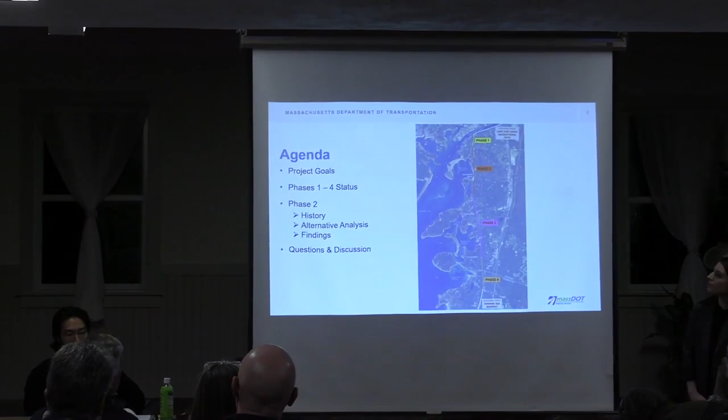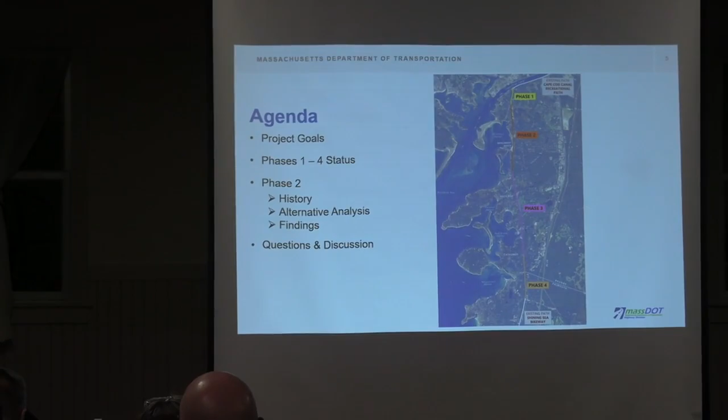On our project goals, we're going to talk a little about the overall project goals, the four phases depicted in our graphic here, which isn't great and legible, but I'm sure everyone in this room knows this better than the graphics on the screen. We're going to introduce the design consultant, VHB, who's working in parallel. They've been working for the town for a number of years on the project. I'll get into that in a moment, but also for this phase, this alternative analysis we've asked them to do. They were the most knowledgeable design firm that had been working closely with the town, so MassDOT engaged them to do a feasibility study for the section of Phase 2.

Can you hit that next slide, Joe? So our project goals, as part of our statewide bike plan, we want to establish and implement a region-wide trail network for all users. The goals on this project for all four phases were to connect the canal path to the Falmouth Shining Sea Bikeway. It was identified in the Vision 88 plan by the Cape Cod Commission, and as stated, under MassDOT's statewide transportation plan, shown on the right side of the screen.

Our goal here tonight is to evaluate alternatives that can be implemented. A couple things I wanted to state at the outset: the Town of Bourne has been a great partner with MassDOT on all phases of the Bourne Rail Trail project. The town hired the designer, VHB, for phases 1, 2, and also 4, which is working in partnership with the town of Falmouth. As the design is developed, constraints with standards, right-of-way, and permitting have surfaced.

While the Highway Division designs and implements many trail networks statewide, we follow design standards as they interact with and possibly impact stakeholders. There needs to be a compromise at times. I don't want to get into the specifics now—I'll let VHB go through a summary of the phases in a moment. However, DOT recognizes that when constraints become barriers to implementation, we've got to find a way through. It may not be 100% consensus; we never achieve that on any project.

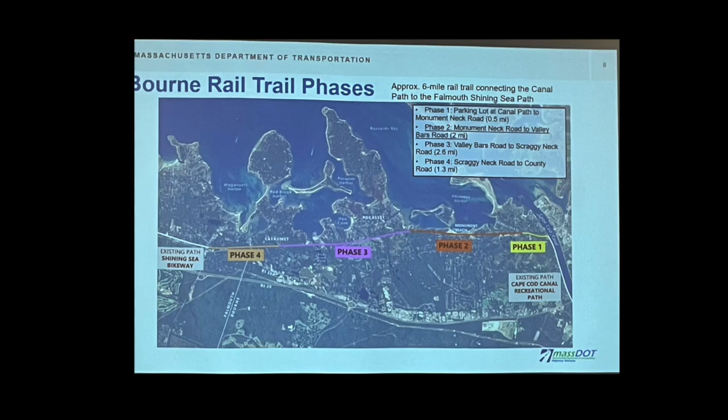Oh, look at that—this is the graphic that John doesn't like, obviously, showing all the phases here. This is just color-coded, but it shows that the trail goes from the canal and will connect into the Shining Sea in Falmouth.

So we wanted to give you a little bit of a project status. We're not just stalemated or banging our heads against the wall—we're moving, we're making progress on this project. It's slow and very methodical; we have to go through the process. For Phase 1, the advertising date is June 2025. So we're nearing final design—there's a few more things to take care of to get there. We're at 75%, and we have the 100% plans at our office waiting to file.

Phase 2 is why we're here tonight—we want to look at different alternatives and ways to get around some of the constraints we identified back in 2019. Phase 3 we're going to start initiating; it's very challenging, with a lot of water courses to cross—tonight's not the night to talk about that, so we'll discuss it in the future. Phase 4 we're at pre-25; we've been meeting with Falmouth and with the rail division on that. That's tucked away right now until we get Phase 1 done, and then we'll talk about Phase 2.

So I want to give you a little bit of the design criteria. We don't just design bike paths. We don't put a bunch of asphalt on just a side line on the railroad or next to a roadway and call it a side path. There's design criteria that we have to follow. And I want to get into a little bit of the history from 2019 to now.

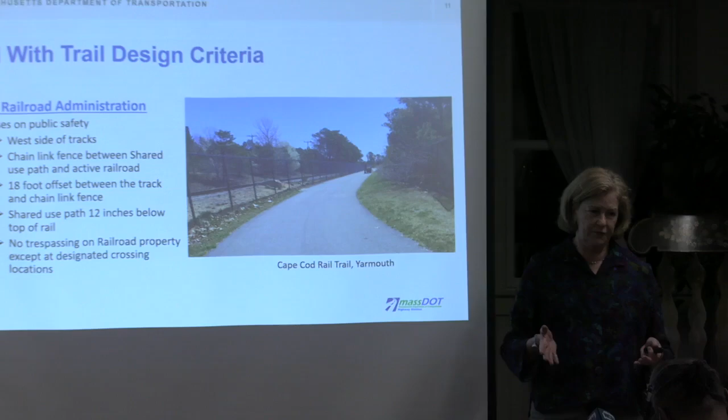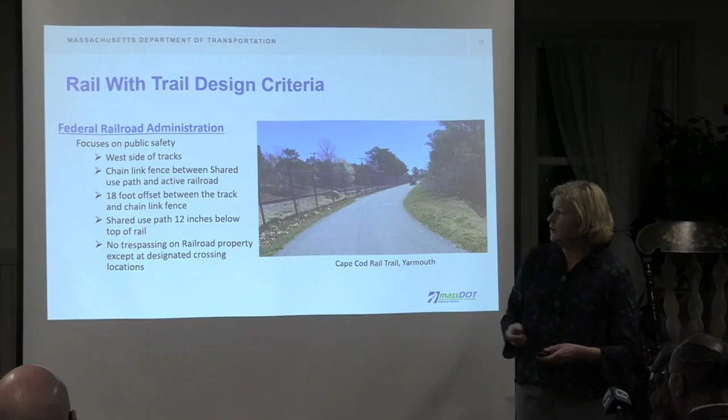One of the things we really had to keep in mind with the railroad is they are very concerned about public safety. They want to make sure that there's no public trespass on their facility. They want to make sure there's an offset from the railroad itself to whatever facility is being designed or proposed for the shared use path. So what they wanted to do is put a chain link fence between the active railroad and the shared use path, put an 18-foot offset between the center line of track and the chain link fence. They want to make sure there's a lot of separation between the two facilities.

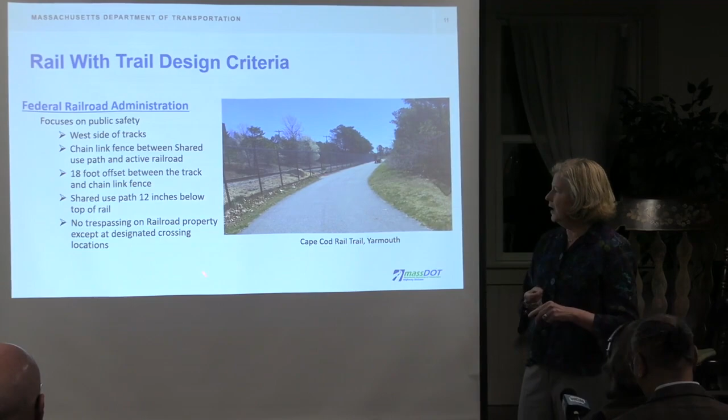And the 12 inches below, that's something that will come into play behind the depot at Worcester Ave. They over and over again express their concern about trespass on the tracks. They know that people are trespassing now, and they want to make sure people are safe. Whenever we go on the tracks, we have to have railroad safety training, and that training shows a lot of accidents, and it really does happen. So they're very concerned about that.

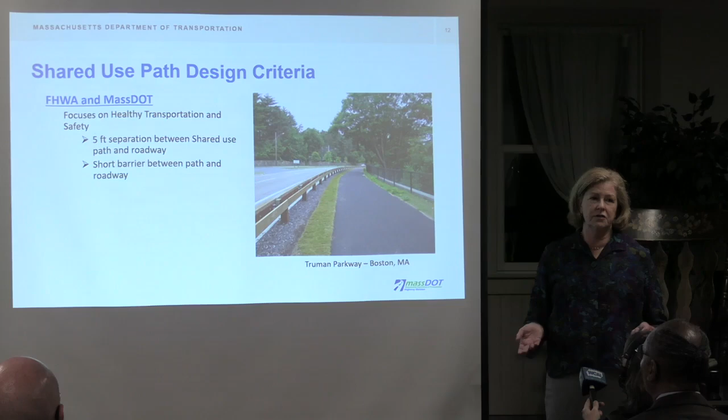FHWA, the Federal Highway Administration, and MassDOT also have a lot of design criteria that we have to follow. What we have to do is really focus on healthy transportation, making sure shared use paths are universally accessible. Like I said, we're not just putting down pavement on the side of a road or the side of a railroad. We have to make sure it has certain thresholds and parameters that we are designing to.

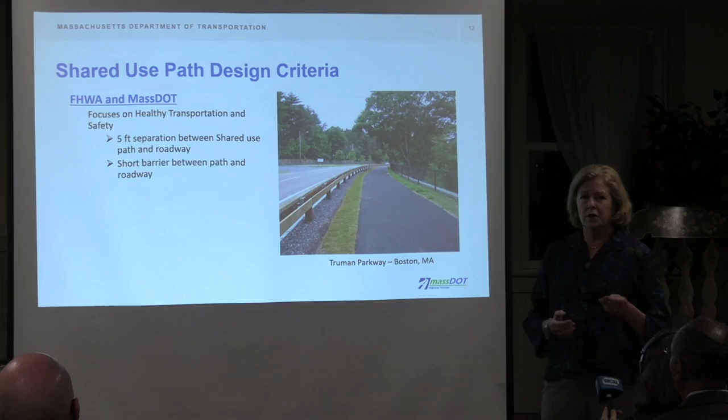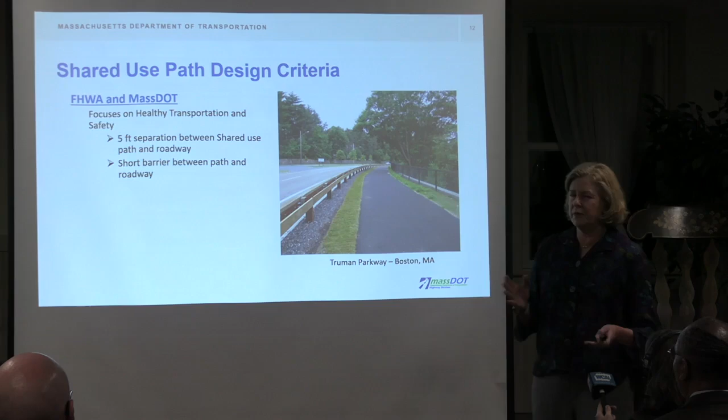Some of the key things we have to talk about here is that there will be a 5-foot separation between the roadway and a shared use path, if that's an alternative you guys would want to consider. And there could be, maybe or maybe not, some type of short barrier, so there would be a separation between the roadway itself and whatever facility is designed next to the roadway for that alternative.

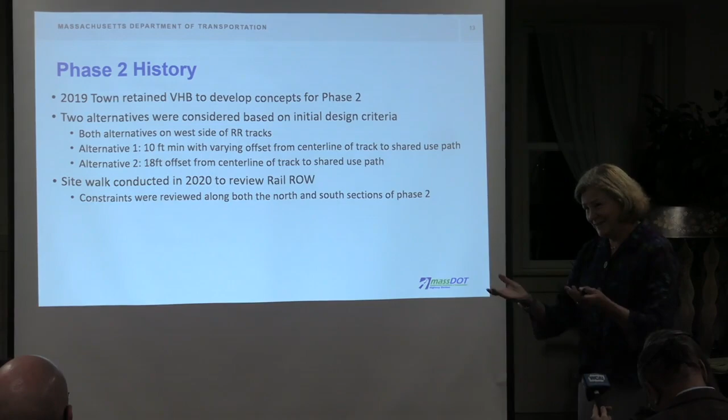So a little bit of history. I have to read this, and it's big enough I don't need my glasses. In 2019, we went under contract. We went through a public procurement process and won the contract. Thank you very much, Town of Bourne, for developing concepts of phase one and phase two. We're talking about phase two tonight.

The two alternatives we considered, and Marissa's been with me every step of the way, was taking a look at what could be built in phase two. Remember, phase two is from Monument Neck down to Valley Bars. And what we did was take a look at, okay, if we were within the right-of-way of the railroad, not knowing that we had the 18-foot offset, what could we put in there?

So the shared use path and the offset from some of the constraints adjacent to the road, the right-of-way, was we had the offset from the railroad, the active rail, to the shared use path, and it went down to 10 feet, and then went out again, and then went down to 10 feet. And we presented that to the MassDOT Rail Division. I'm just going to call it the Rail Division. And they were very concerned about that, and they told us we had to hold the 18 feet.

So when we did that, there were a lot of things that came up. There are a few red flags. There are some constraints, and I'm going to go through these tonight so that you understand what we went through back then.

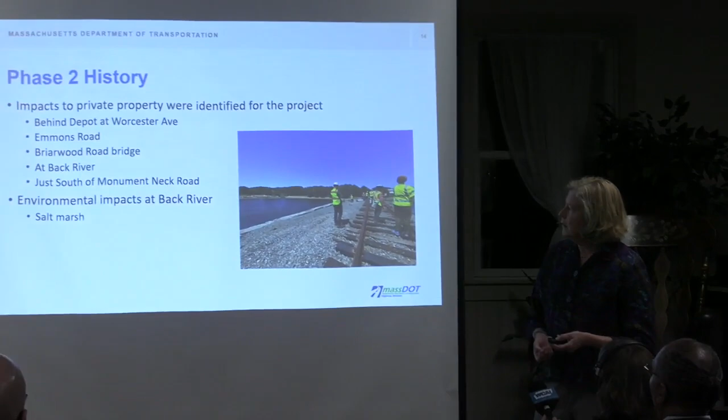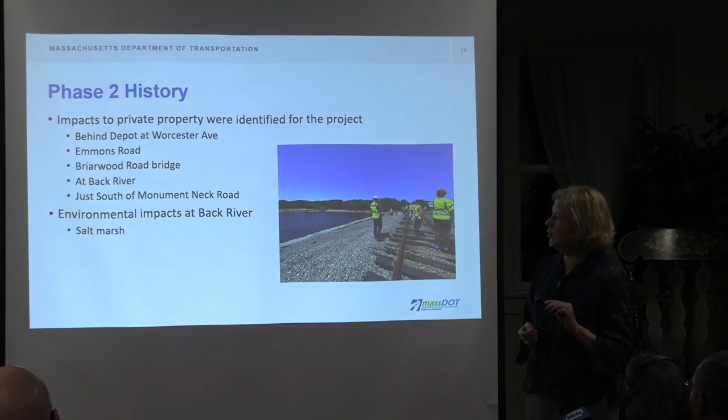Some of the things we saw were impacts to the right-of-way, keeping the 18-foot offset, and impacts into private property. These locations were specifically behind the depot—I have a graphic to show you—at Emmons Road, at Briarwood Bridge, and at the Back River, and just south of Monument Neck Road. So there are existing features we have to take a look at when designing rail trail projects, which is what we're talking about tonight.

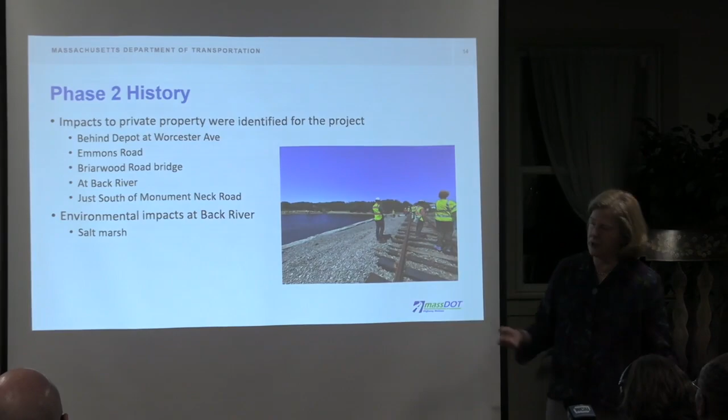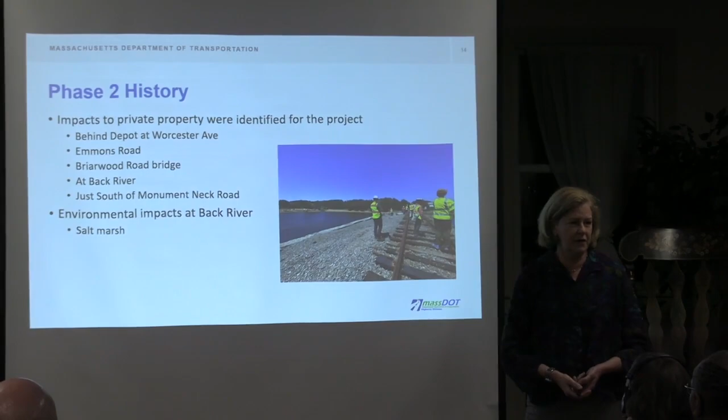The other thing we had to note was some of the environmental features out there. This is a bunch of us nerds out at the Back River—you can see it's a beautiful vista, it's gorgeous, a really lovely spot. But there's also salt marsh and other things we have to be mindful of as we move forward with permitting.

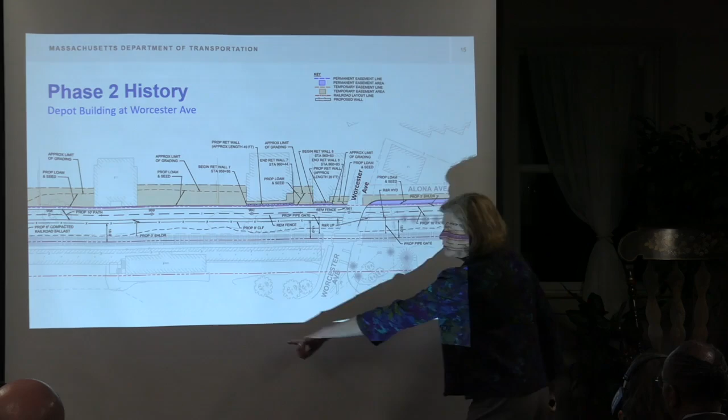So there were some constraints we had to take a look at. This is a concept plan we developed in 2019, 2020. This is Worcester Ave, and Shore Road is down here—just trying to get it oriented.

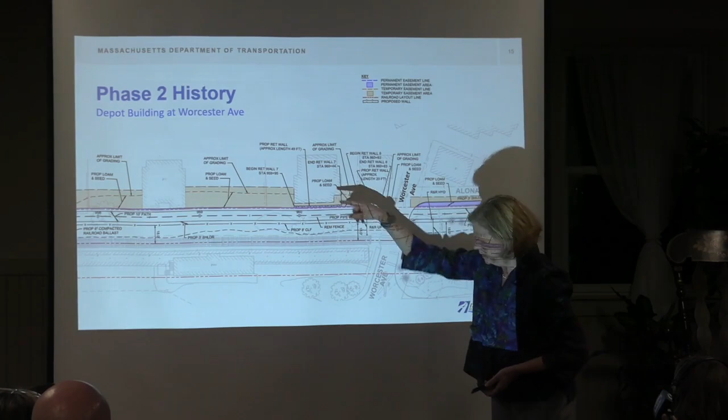This is the active railroad, and this is the depot building here. These boxes are all the residential houses behind the depot, which you all know, right?

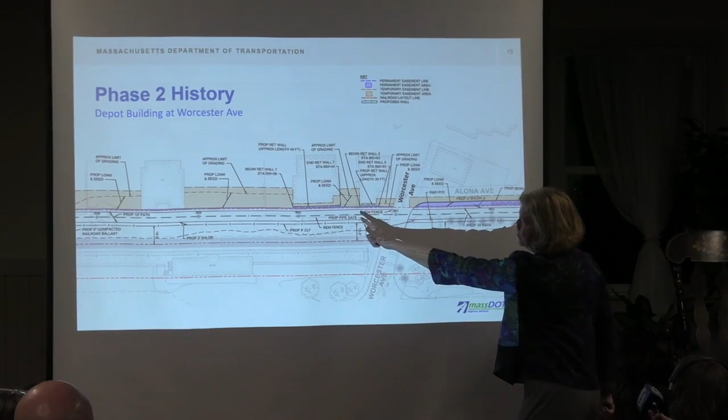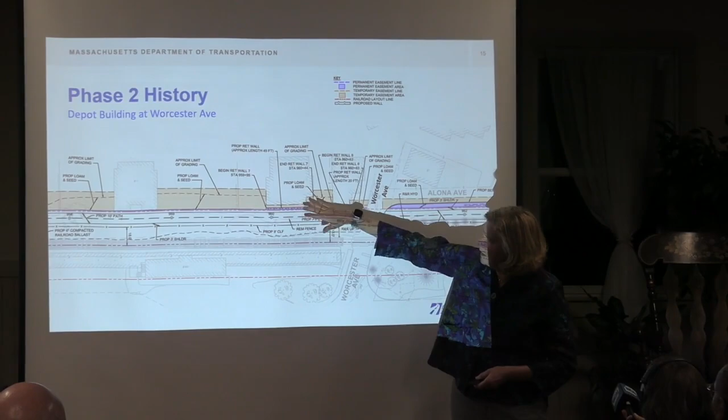If we put the shared use path 18 feet off the center line of track—one of the design criteria to meet safety for the railroad—the shared use path ends up very close to the residential property, with one actually on it. One concern was whether we could put in a retaining wall, but the houses there would have the wall right at their back, whereas now they have at least some space between the railroad and their back door. This was one of the areas we thought was very constrained.

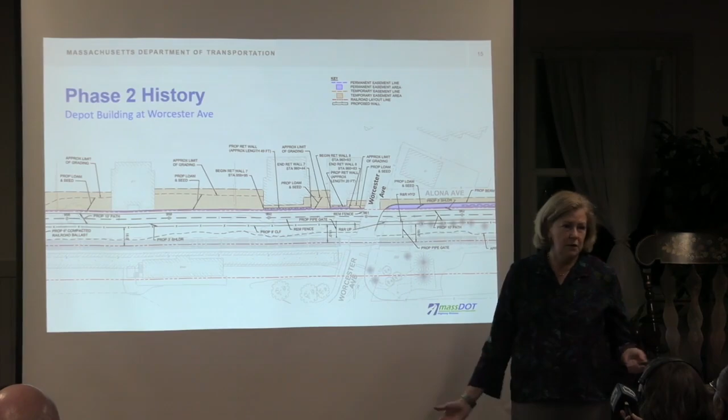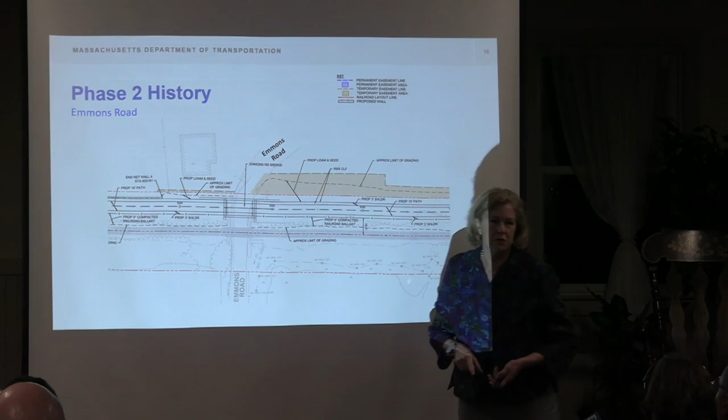This is Emmons Road—you know that really narrow, short bridge. If we put the rail with trail, the shared use path, 18 feet off next to the railroad here, it's about 20 feet off of that house. That's something else we wanted to think about. It fits within the railroad right-of-way, but it's very close to that house, just encroaching a little bit.

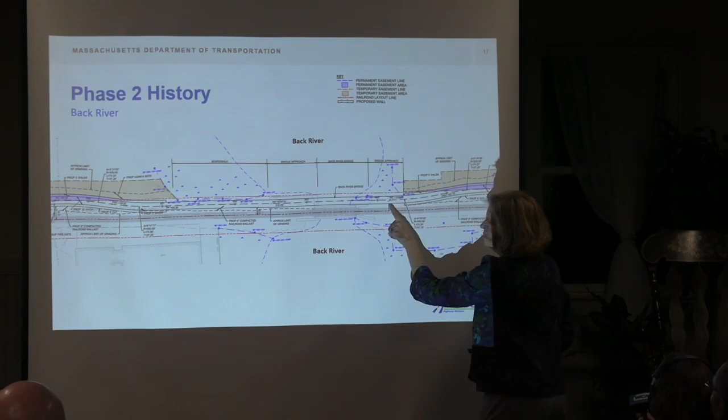That's why it goes down and over, can you see it? The reason is there are existing abutments from the former railroad—there used to be something there, you guys could probably tell me what it was—and we can reuse that for the shared use path. These blue lines are some of the salt marsh, which is something we have to be very mindful of.

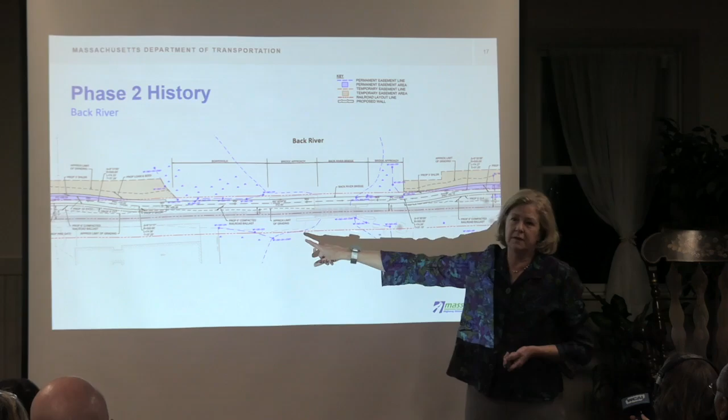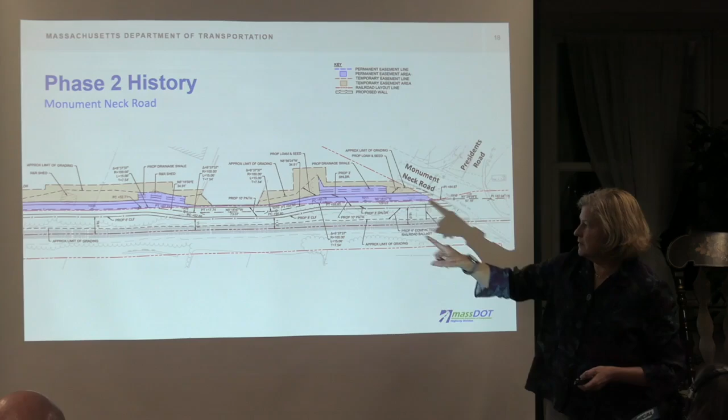So this is the right-of-way, these red lines. And this, I believe, is an above-grade septic. Is that right? The groundwater is probably pretty high at this location. So this was permitted and constructed, so that's something that we wouldn't be able to relocate. So that would be another location where we just couldn't make that 18-foot offset. And again, remember, the 18-foot was a safety feature that the railroad really wanted.

So we have come up with alternatives. I'm going to hand this over to Marissa in a minute.

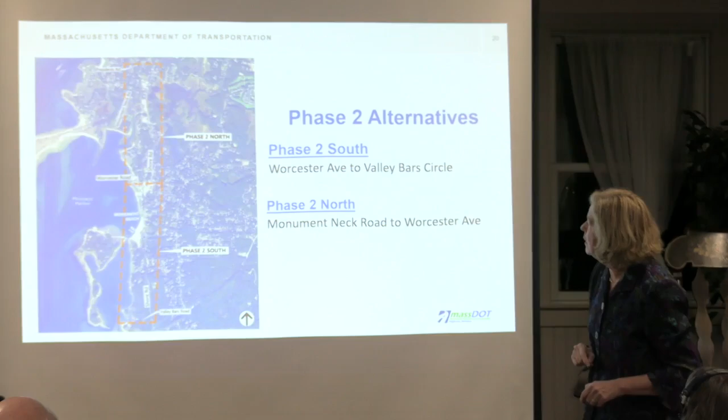So what we did, because the land use -- does everyone have to take a deep breath? I just gave you a wicked lot of information. Are you guys good? So the land use along this area and the constraints are a little bit different.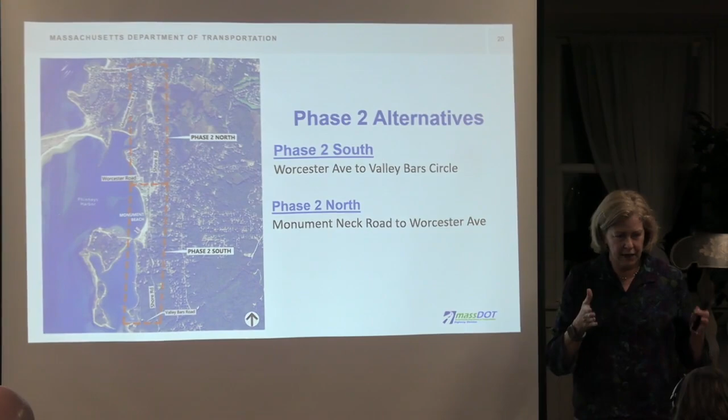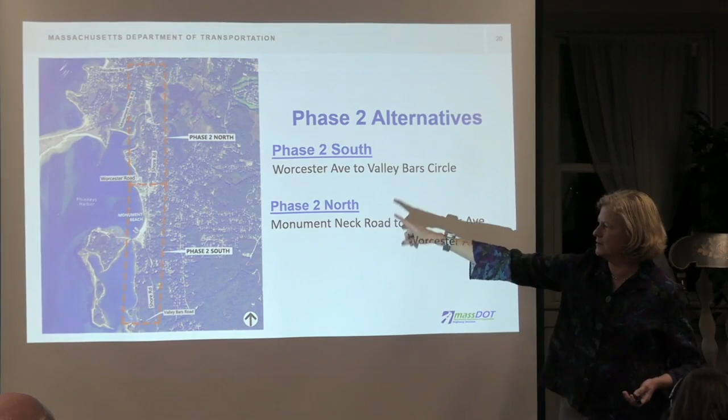So what we did, and it's 2 miles, we broke it into 2 separate sections so that we could do a feasibility study and really hone in on different alternatives for the 2 different sections. So we're going to talk about the southern section first, which is Valley Bars up to Worcester, and then we'll talk about Worcester up to Monument Neck after that. It was easier to see different alternatives this way, but as John had mentioned, we're still trying to look at alternatives that could be implementable in a shorter time frame than relocating the rail line.

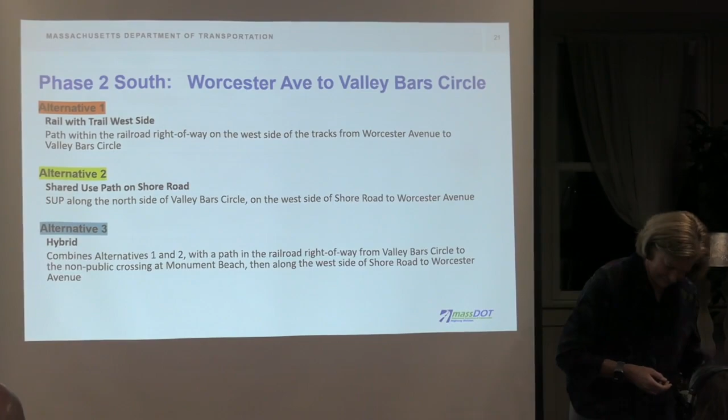All right, my turn. Go ahead, ma'am. All right, thank you, Trish. So the first part that I'm going to go over is the southern part of the Phase 2 analysis, from Worcester Ave to Valley Bars.

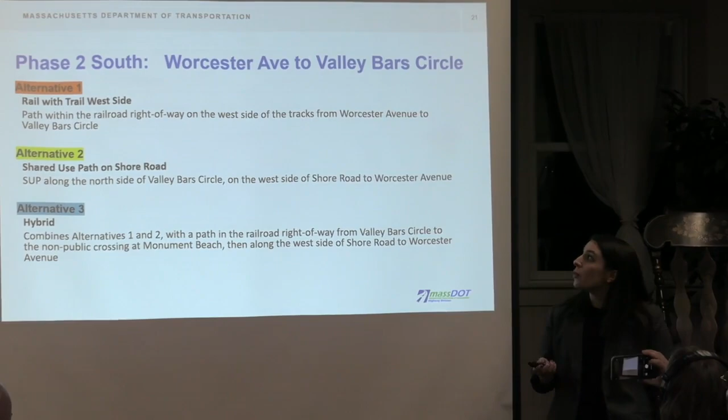VHB was asked to evaluate 3 different alternatives for the southern part. Alternative 1 is a rail-with-trail on the west side of the railroad tracks. Alternative 2 is a shared-use path on Shore Road. Alternative 3 is a hybrid of alternatives 1 and 2 -- a rail-with-trail from Valley Bars to Monument Beach, where it would utilize an existing emergency vehicle crossing to transition the path into a shared-use path on Shore Road to Worcester Ave.

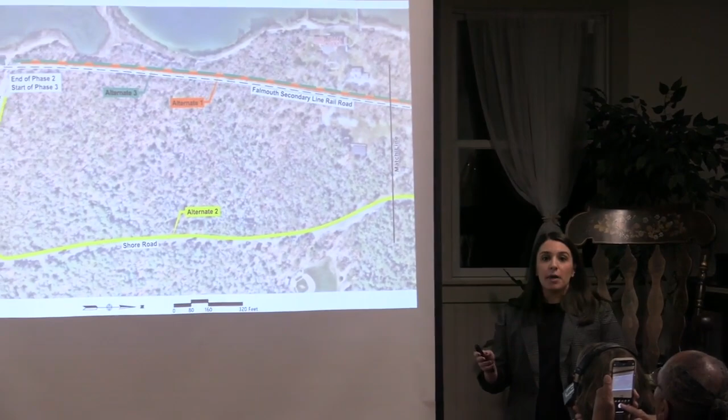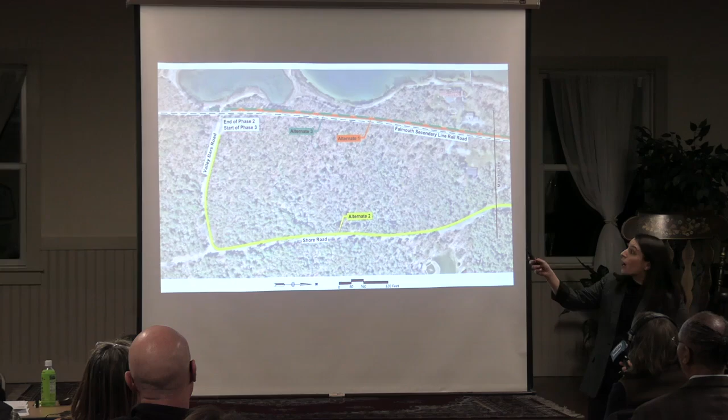So the next few slides are just going to be some zoomed-out aerial images that show the different alignments of each alternative. You can see here at Valley Bars, alternatives 1 and 3 are on the west side of the existing rail line, where alternative 2 travels east on the northern side of Valley Bars to Shore Road, where it then travels north on the west side of Shore Road.

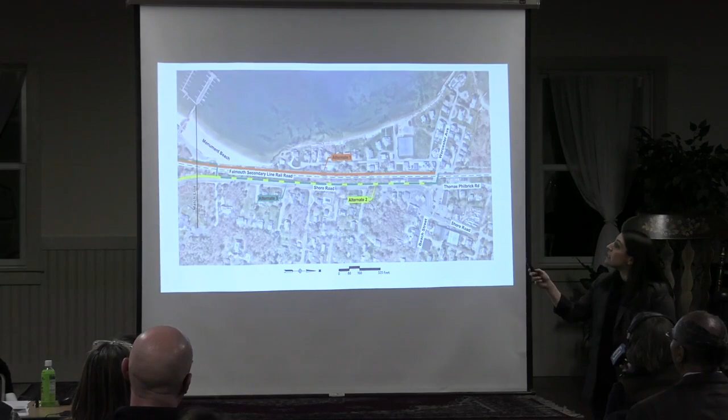And then our last view here, you can see where alternative 3 transitions from the rail-with-trail on the west side of the tracks to the shared-use path along Shore Road. Each of these alternatives ends at the Worcester Ave intersection, where the northern part of the study picked up, and we'll go over that in a little bit.

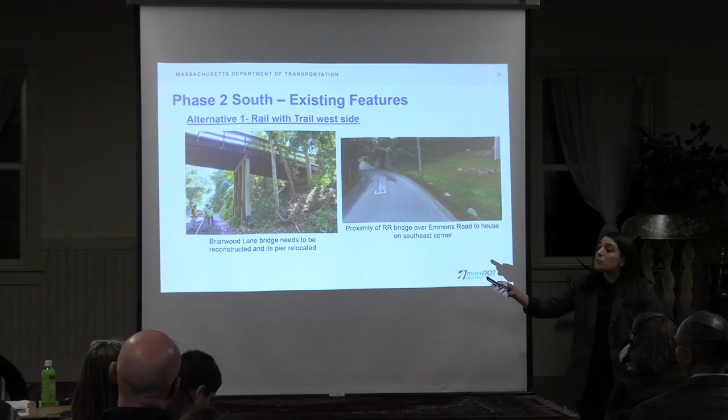So now, just to go over some of the existing features along each of our alternatives -- the image on your left is of the Briarwood Lane Bridge. It's an existing structure. We are looking at trying to fit the path in the space between the pier and the abutment, but that would have to be further evaluated to determine if there would be any structural impacts to the existing bridge.

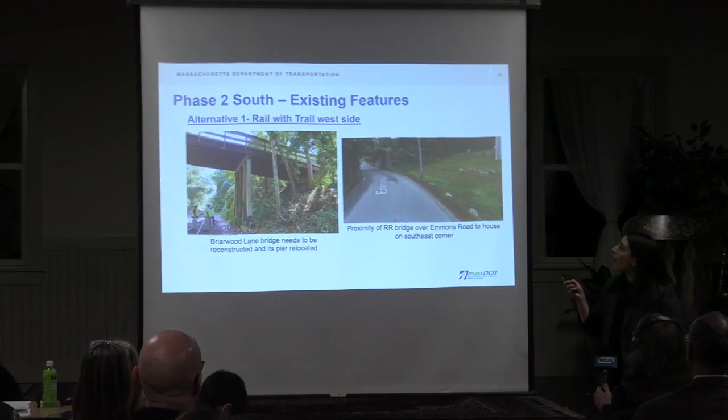The picture on the right is of Emmons Road. You can see in the distance, that's the existing railroad bridge for the tracks that go over Emmons Road. This is the area that Trish was mentioning in the history. In the corner right here, that is the existing house that would be about 20 feet from the proposed bridges that would go over Emmons Road, 18 foot off of this existing structure.

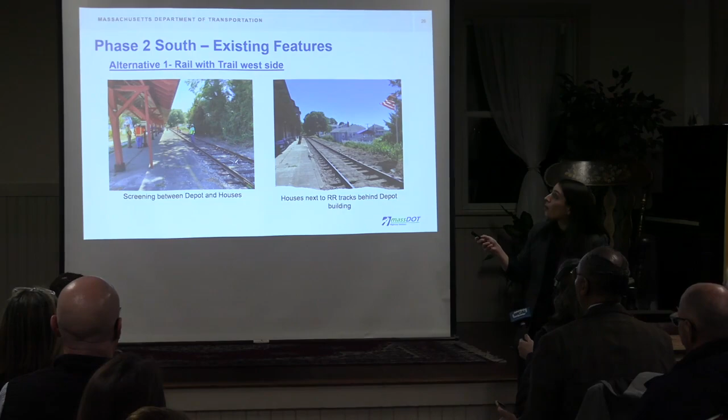Continuing on, both these photos are taken at the existing depot area. You can see in the picture to your left how all of this existing screening and vegetation would have to be cleared away. And the picture on the right shows those residences that are really close to the right-of-way over there.

So now just to show you what a typical section of alternative 1, which is the rail with trail on the west side of the railroad tracks, would look like. This section is looking north. You can see we have the 10-foot shared use path with a shoulder on both sides, offset from the existing track, and the chain link fence that separates the path from the track. This is also the same typical section that's being used on phase 1.

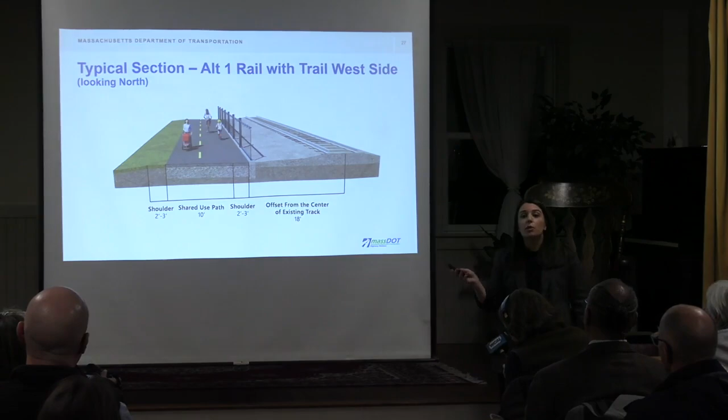All right, now to go to Shore Road. Both these photos are Shore Road. The picture on your left is at the depot area, you can see the depot there. And this just shows that horizontal curve that is at Shore Road in this area.

The picture on the right is a section of Shore Road, and you can see there is an existing sidewalk in this section. There's not sidewalk on every section of Shore Road, which makes it not universally accessible in these short spurt areas. Also in this picture, you can see the informal parking happening on Shore Road. That's not enforced, but since Shore Road is a state highway layout, parking is technically not allowed.

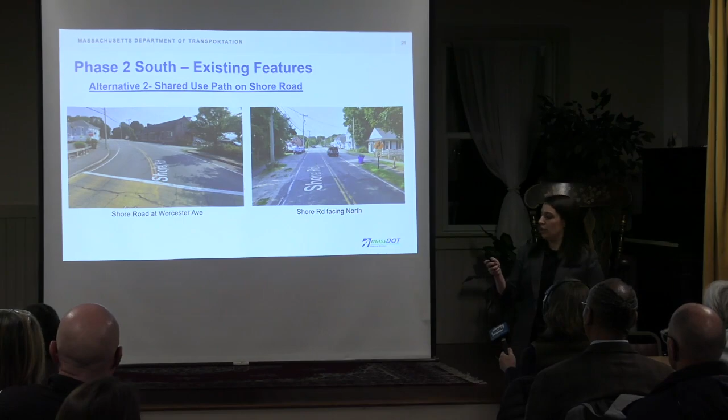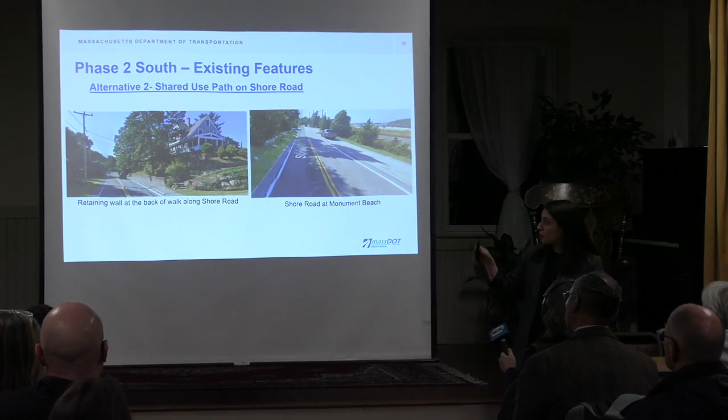Continuing on Shore Road, this is close to the Emmons Road intersection with Shore Road. You can see this existing house is a lot higher than Shore Road. There are a few retaining walls, specifically this one at the back of the existing sidewalk. To avoid really major impacts to this drastic change in elevation, one thing that could be evaluated is shifting Shore Road a little further to the east. It appears that it's not actually centered in the state highway layout, so by shifting it to the east, we could fit in the shared use path without majorly impacting that existing residence.

Also, wow, that got a reaction.

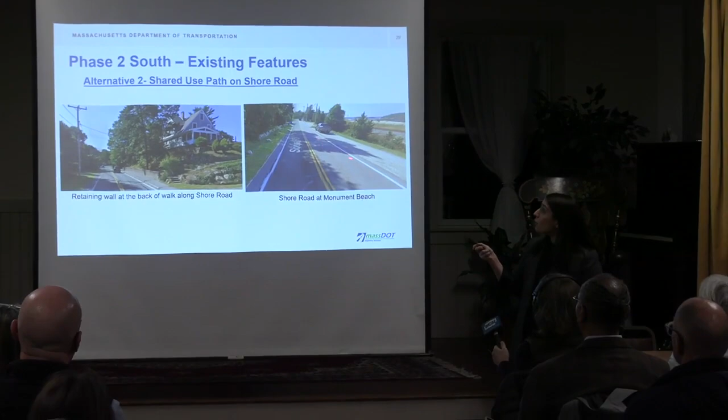Also, the image on the right is another area of Shore Road, at the Monument Beach area. I just wanted to point out how people seem to park informally on Shore Road near here because they want to go to the beach, right? Who doesn't want to go to the beach in the summer? But they're parking on Shore Road and then trespassing over the tracks to get to the beach, which technically is not allowed.

What question? Referring to that second, at the end? Yeah. What slide number is this, so we can note it? Slide 29. Okay, thank you.

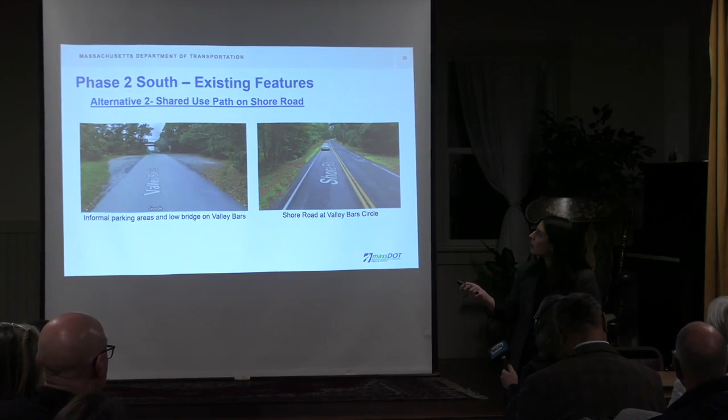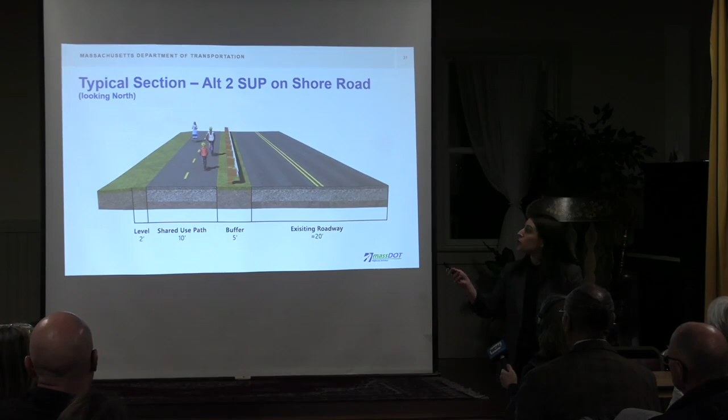All right, you see there's a pattern to the slides now. This is a typical section for the shared use path alternative, also looking north. You can see from the existing roadway we have a 5-foot buffer. In this typical section, as an example, we're showing the small barrier when we have the 10-foot path with a 2-foot shoulder on the other side.

Now just to give you guys some examples and visuals of shared use paths that were constructed. This on your left is Greenough Boulevard in Cambridge, and this on the right is Truman Parkway in Boston.

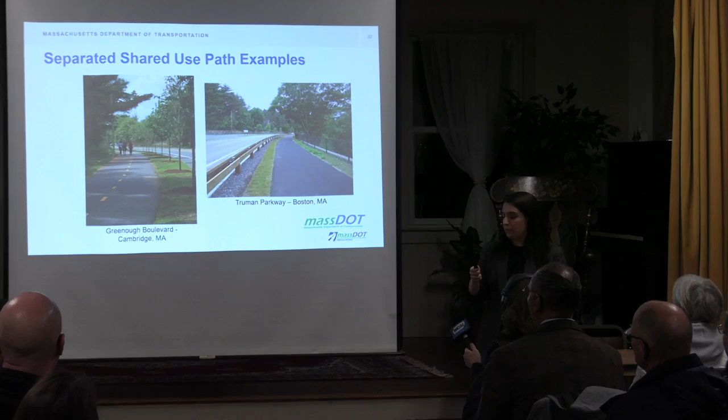So now for the hybrid alternative, I just wanted to show the existing emergency vehicle crossing that is there today. This connects Monument Beach to Shore Road, allowing emergency vehicles to get through when needed. This is what we would suggest to utilize for the hybrid alternative.

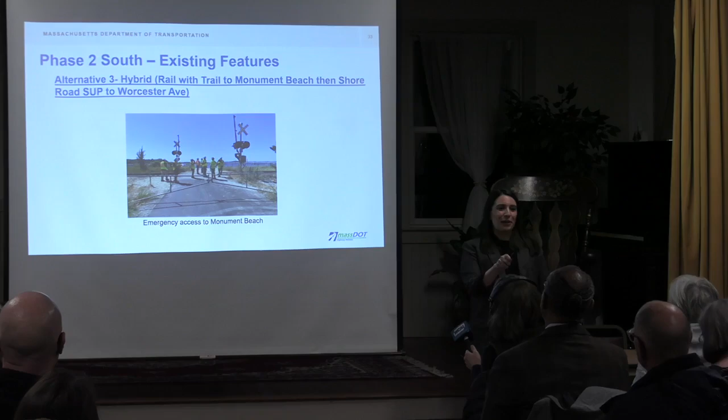Why wouldn't it be trespassing? Slide 33, remember that for later. Thank you for your understanding. So we have slide 29 and slide 33 bookmarked.

All right, so that was the southern portion of the Phase 2 study. Now to move on to the northern part of the Phase 2 study, which goes from Worcester Ave to the Monument Neck Road, President's Road intersection. VHB was asked to evaluate 3 additional alternatives. What we're calling alternative 4 is a rail with trail on the west side of the tracks. Alternative 5 is a shared use path on Shore Road. And alternative 6 is a rail with trail on the east side of the existing tracks.

Similar to the southern part, for the northern part I'll show you some aerial images that show the different layouts for each of the alternatives. You can see at Worcester Ave, alternative 4 and alternative 6 are on the west side and east side of the tracks, where alternative 5 goes along Shore Road.

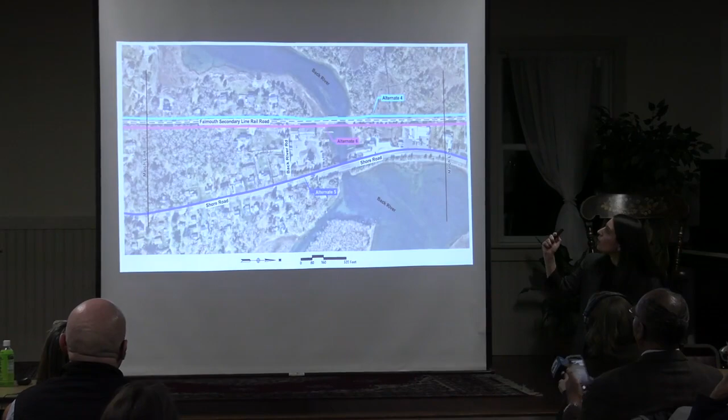Continuing on, this is how each alternative would progress. For alternative 4 and alternative 6, proposed bridge structures would be needed to span over the back river. Whereas for alternative 5, we propose to fit the shared use path on the existing Shore Road bridge that goes over the back river.

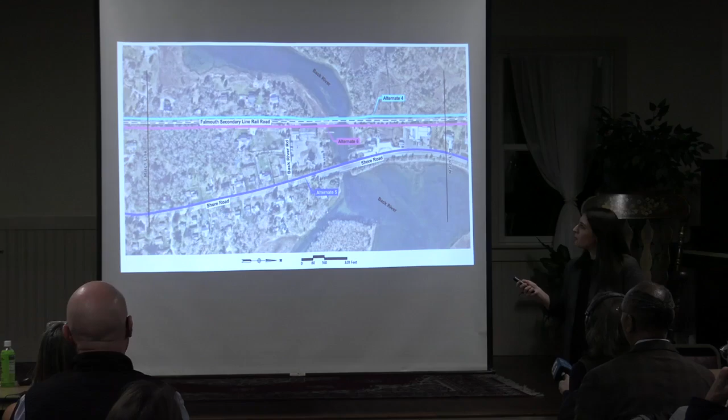And then lastly, you can see alternatives 4 and 6 continue along the rail line, where alternative 5 continues on Shore Road to Old Dam Road, where it will cross over Monument Neck Road, and each of these alternatives ends and meets up with Phase 1 of the project at the President's Road, Monument Neck Road intersection.

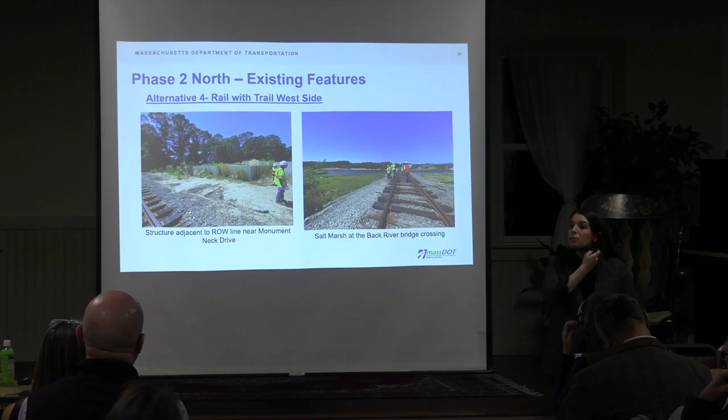Now to talk about some of the existing features within the northern part of the Phase 2 study. The image on your left is of that concrete foundation that Trish was mentioning near the Monument Neck Road, President's Road intersection. You can see, as we showed in the history part, it goes right up on the layout line.

The image on the right is at the back river. Beautiful view. And you can kind of see some of the salt marsh that we mentioned was in the area.

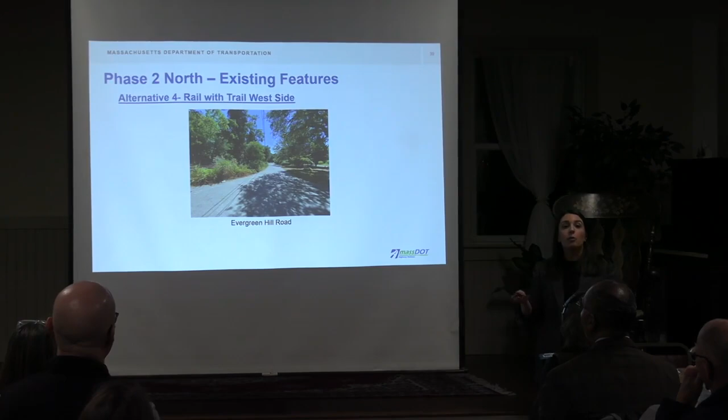Here we have Evergreen Hill Road. This is an example of a grade crossing that would be needed. We chose this one in particular because I wanted to point out how the vegetation and the screening would need to be cleared to make sure there's adequate sight distance for the crossing.

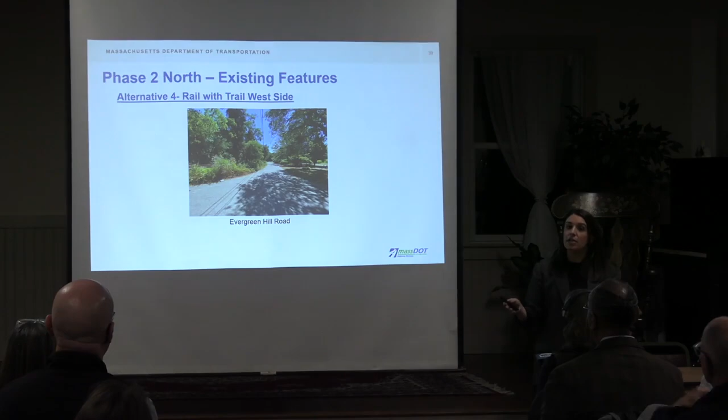Here is what the typical section for alternative 4, which is the rail with trail on the west side, would look like. This is the same typical section as alternative 1 in the southern part, and the same typical section as Phase 1. Looking north, we have a 10-foot wide shared use path, shoulders on both sides, the 18-foot offset from the center of the existing track, with the chain link fence separating the path from the track.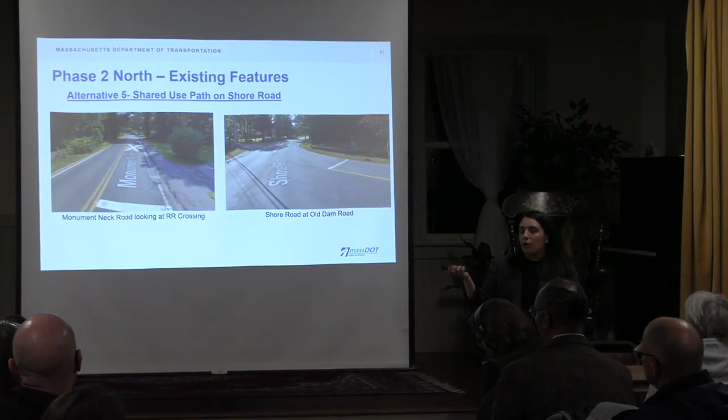You can see in this image some of the Monument Neck Road area isn't in the best condition, which could be repaired by installing a shared use path. Also, similar to the areas of Shore Road, Monument Neck Road does have a little sidewalk here, but it's not universally accessible. The image on the right is of the Shore Road at Old Dam Road intersection.

This is a very wide intersection. On Old Dam Road is the Monument Neck Cemetery, which has a stone wall going around the outside of it. At this corner, the wall creates a pinch point for a proposed path. So we recommend that this area would need to be evaluated further to make sure we don't impact the cemetery, since it's a cultural and historical area.

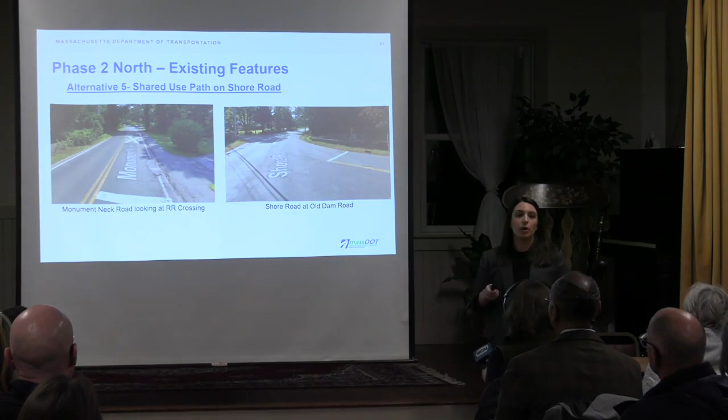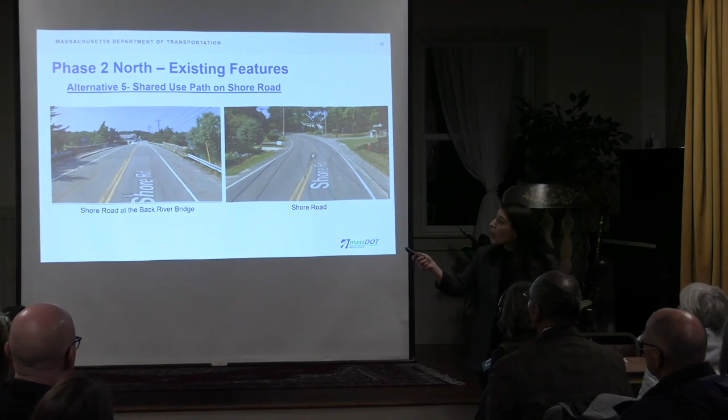Next, we have Shore Road at the Back River Bridge. You can see here we would propose to put the shared use path within the existing structure, and we would just have to do some additional analysis to see if there would have to be any modifications to the existing structure, because we'd be adding the shared use path.

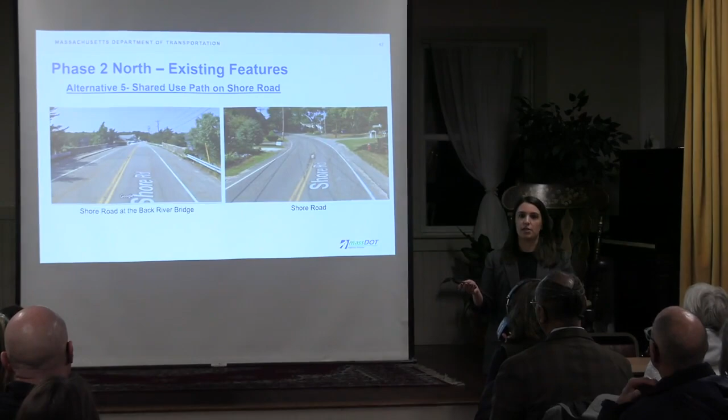The image on the right is of Shore Road. There are, in the northern part from Worcester Ave to Monument Neck Road, a lot of driveway crossings to Shore Road. It appeared when we were looking at it, there were a lot more houses in that stretch, which is why we had so many more driveway crossings.

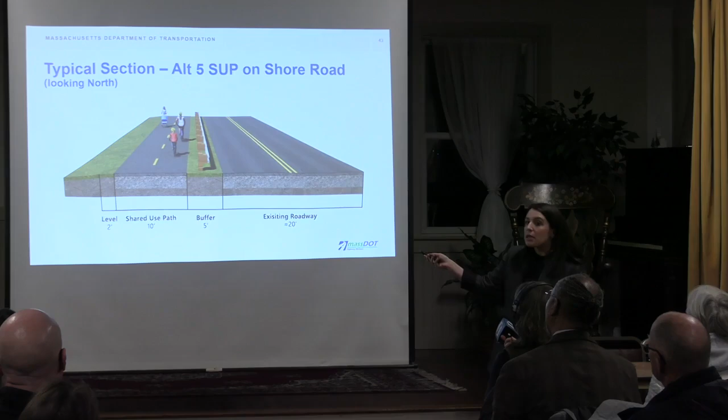And here we have the typical section for alternative 5, the shared use path on Shore Road. You can see we have the 5-foot offset from the existing roadway, an example with the small barrier, the 10-foot path with the 2-foot shoulder.

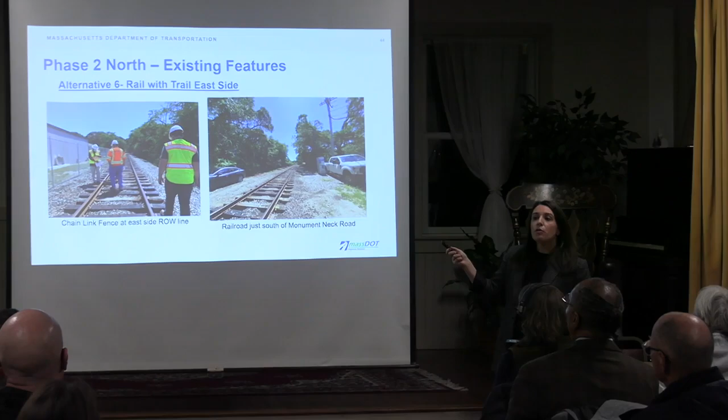And then the picture on the right is at the Monument Neck Road, President's Road intersection. Just to point out that there's a lot of vegetation and everything, but at this intersection, there was not any foundation that we would run into.

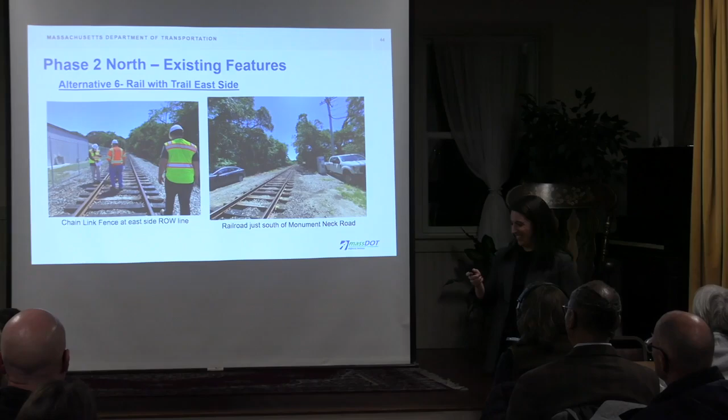Slide number 45, thank you. I've lost track of the slides now, so you guys will have to remind me. It's in the top right. No, I meant which slides we were bookmarking to go back to.

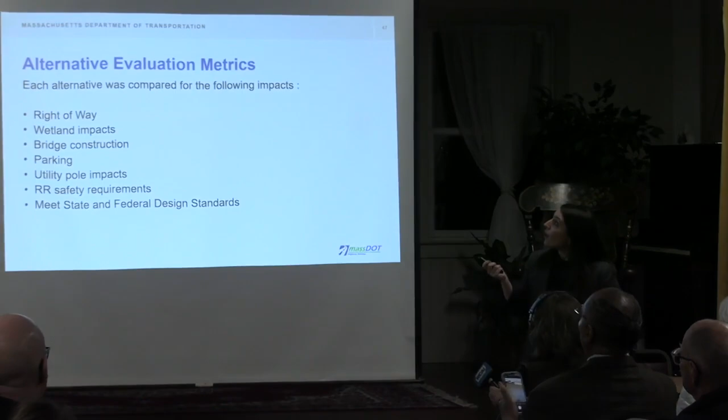All right, so now that we've looked at all of these alternatives and laid them out, what did we do with that information? VHB prepared evaluation metrics for all of these impacts listed on the screen, and we compared each alternative based on these impacts. So now I'd like to turn it back to DOT to finish up.

A couple things we're going to open up to discussion, and I'm glad people had comments. We're not trying to stifle any discussion. We just wanted to get through the whole thing, and then we'll go back to any of the slides that were asked about and take some of that discussion.

When we initially started out, I appreciate VHB going through a little bit of the history and then the alternatives and some of the metrics we were using to measure the effectiveness of the alternatives for the railroad trail on the east side of the tracks, on the west side of the tracks, or on Shore Road. We wanted to identify what our constraints were on each of those alternatives. One item we didn't really discuss before now is Joint Base Cape Cod.

I just want to quickly go over a couple of items. I don't need to give the history of Joint Base, you guys all live with it. But it's an important military training location in the Northeast.

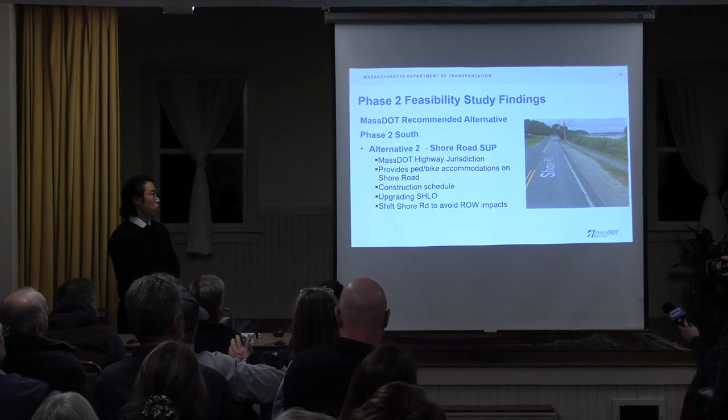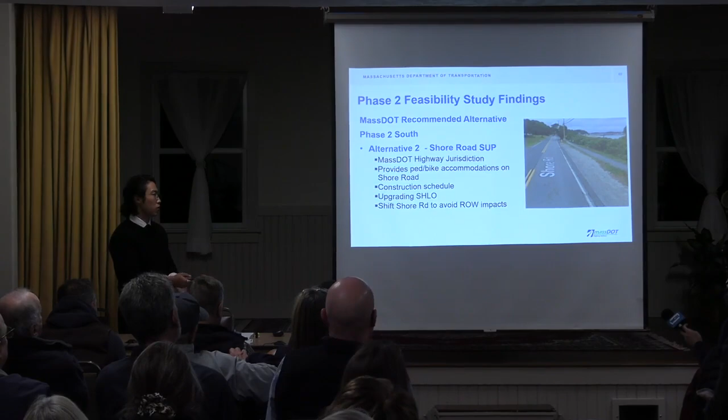This slide shows the Phase 2 South section, and Alternative 2, the Shore Road Shared Use Path, is Mass DOT's recommended alternative. A couple characteristics: this is under Mass DOT highway jurisdiction, and will provide this corridor with pedestrian and bicycle accommodation along Shore Road. This will speed up construction schedule and upgrade our state highway layout, and at certain points along this corridor we can look into potentially shifting Shore Road to avoid significant right-of-way impacts.

This is the Phase 2 North section and Mass DOT's recommended alternative for this section. We recommend either Alternative 4 or Alternative 6 - both are rail with trail. Alternative 4 is the trail west of the railroad, and Alternative 6 is trail to the east of the rail. This will involve more significant coordination between Mass DOT and our rail division partners.

This presents an existing condition where we try to avoid Shore Road at this section because of the dense neighborhood characteristics Shore Road contains here. This includes avoiding Shore Road driveway crossings, which would increase potential pedestrian and bicycle conflicts with vehicular users, as well as historic impacts - the Monument Neck Road Cemetery and the stone wall. This avoids right-of-way impacts as well, and will also avoid impacts to private parking on Shore Road businesses.

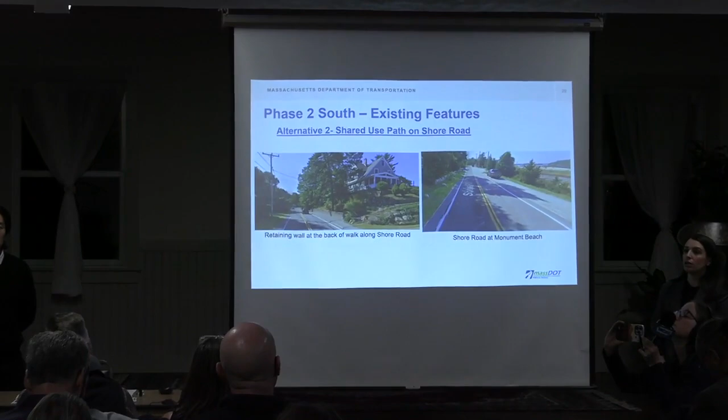I was asking about slide number 29. So, my question now—it looks like you're proposing alternative 2, which is a shared use sidewalk bike trail for this section. Right? Yes. Okay, by the way, I think that's the best, just listening to what you had to say. Okay, thank you, next one.

That was a statement. That was very clever, though.

Now my question to you is actually a two-parter. One is, if it's a shared path, is there still going to have to be a chain link fence along the pathway separating the train tracks from the path?

On the water side, I don't believe so. If we're not within the right of way, we're not planning to install chain link fence within the rail right of way for the rail division.

A concern we had is if you go and install—it doesn't sound like it would be necessary for this, but I was going to ask how high that chain link fence would be. Because if you've got a tall chain link fence going the whole length of Shore Road, you're essentially going to be creating a terrible eyesore, spoiling the view that we've all been singing the praises of.

Chain link fence is really only proposed when we're in proximity to the rail division, and the rail operator or business operator is concerned about trespass and wants a separation. If we're going to put walkers, riders, rollerbladers, etc., they need separation because of public safety. On a shared use path on the roadway, we're not envisioning having a chain link fence or anything like that.

All I asked was that you answered that question, that you looked at an alternative at the intersection. All the other issues, underground utilities, those are benefits that DOT does not typically fund, it's not needed for the project. It's part of an enhancement to the community in that area. So it's not generally fundable by DOT and federal highway for doing that stuff unless it's necessary, because it's in an area that gets knocked down all the time or something, from whatever event. So I would say that the designers looked at alternatives to improve the intersection to fit the shared use path through there, but we did not explore enhancements such as underground utilities, et cetera.

We would look at how we could mitigate any parking that we may impact as part of fixing that intersection and more defining the movements through there. Drainage would all be part of that, but we didn't look specifically at any enhancements to bury utilities.

That's what I was going to say. Well, that's a DOT call. But if you're tearing up and moving the road, like to the left in this picture here, you have to move those poles anyway, so why not put them underground? Yeah, but they're privately owned poles and utilities, and they dictate a lot of that stuff and what we reimburse for.

We've got a couple in the back. We'll get you, sir, because you haven't asked a question, and we'll come back to you soon. Just had a question on the monument north piece, the rail with trail. You mentioned there was a septic system near the intersection. The wholesale processing plant is also right up against it. I think that right of way is extra narrow, so like 50 feet versus 75.